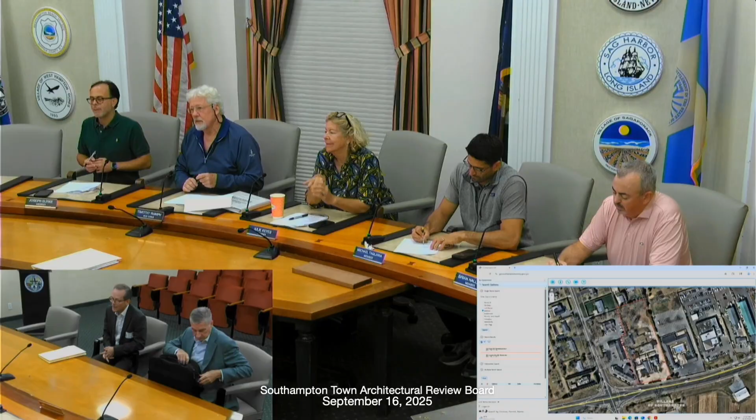We're in front of you with the property located at 257 County Road 39A, just outside the village. Some of you will remember it as Beacock's Gardens, others as Frankenbach's, if you've been here a while and you're old like me. So we made an application to convert part of the structure to a non-medical marijuana dispensary.

Got a copy of the site plan here, and I can show you what we're doing. There's a front set of buildings; this is where the dispensary itself will be located, and then there's storage. It's the storage building that we're replacing that's before you today. There's also a separate retail space that we're a subtenant for—the tenant has retained that, and it's part of the Merit Furniture store. So we have these two spaces, and that's the building we're looking at.

I did print out just some photographs that we had submitted to the planning board, and I can pass them down if you like.

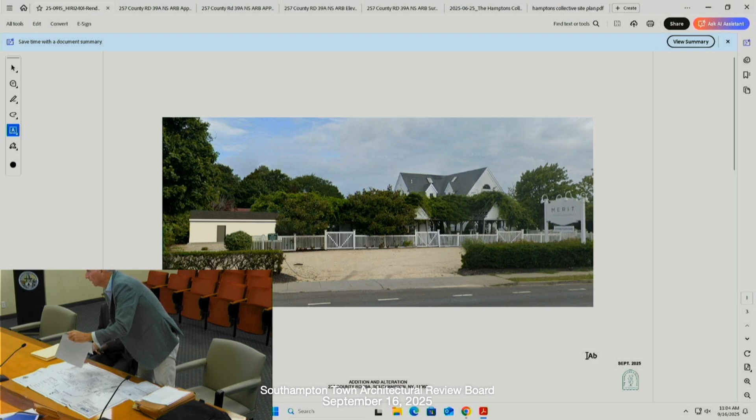The first photograph I took from the sidewalk, and you can see the building is set back behind some landscaping there. The second shot, I'm standing here looking at the building in a, I guess, south direction—it shows the building. The next two shots are up close, and they'll show you what poor condition the buildings are in now. There's an access way, and you'll see it's almost like a tarp is over the right-hand side in that picture of the roof. And then this is me standing where there's that indent, taking a shot of the roof.

So the structure's in really poor condition. Do you have a picture of this that we have, Kelly? I don't have those, no. This is the approved site plan. You may have it—there was also one with the highlight, the storage one highlighted. Yeah, there it is.

Thank you. So we went through the site plan process, we had site plan approval. Actually, prior to that, the planning board gave us a resolution of no objection to the issuance of a building permit, and I think that occurred somewhere in May, June.

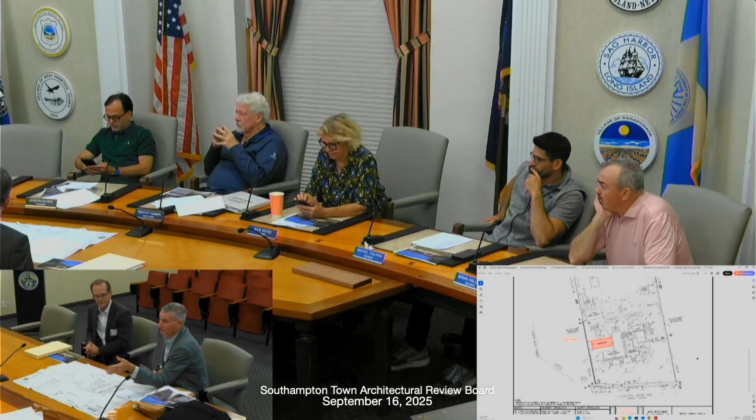Made an application for a building permit. It went back and forth with the building department about whether we needed to come here or not. I think Art Gerhauser said we probably do, and other people in the building department said we didn't have to come. So we're here, happy to discuss it. But in between the time we got the no objection to a building permit, we were able to get the actual site plan approval. So the site is approved, we're ready to go, and it's just a replacement of this building, which is in poor shape.

Can I ask, then, why are you here? Because Art Gerhauser concluded that we needed, or it would be a good idea, to get your approval. Well, it's really not—correct me if I'm wrong—what I understand is we're a referral to the planning board. They approve the architecture, not us; we send a recommendation to it. So how can we help Rooney and Paul on this application? What do we do?

So you could just issue a recommendation letter if you support it. Just want to have it in the file, so there's no issue after the fact. If I'm not mistaken, the original site plan didn't show the storage building.

It did, yeah. We've always had the storage building. It's an existing building that we were always using. I don't know why it wasn't referred. I just want to make sure we do it correctly.

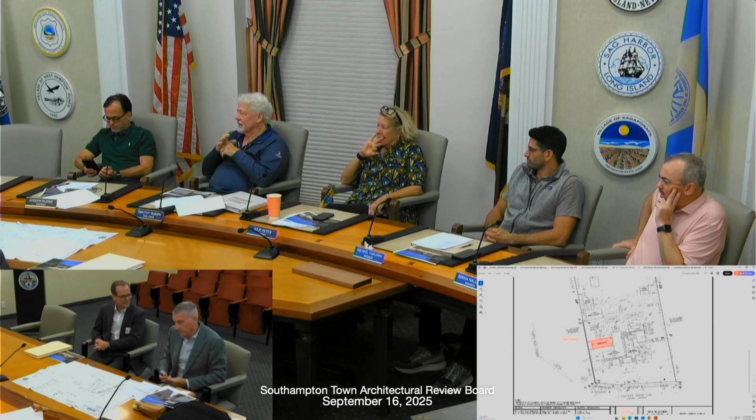I'm sitting here, and you said you already have site plan approval. I'm going, oh, what are you here for? Because usually we're in that process. I think planning probably thought we didn't need it, and then Art flagged it. So Kevin Pohl is here, and he will go through exactly what the change to the building is, although it's in place and in kind.

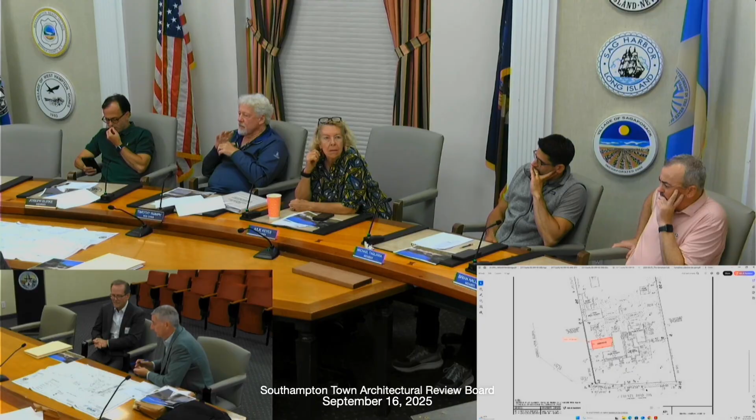So we are replacing the existing building in the existing footprint and existing size. The height and materials we're bringing up to speed a little bit. Right now it's a metal frame structure with fiberglass cladding on the outside and a fiberglass roof. We're making it conform to the current building code relative to storage use, and how it applies to zoning.

What materials are you going to use on the roof and siding? The roof will match the existing roof on the main retail building, which is a 30-year gray asphalt shingle. Is that the main retail, the house-like structure? The house-like structure is actually behind the main retail. The main retail is mainly covered with growth.

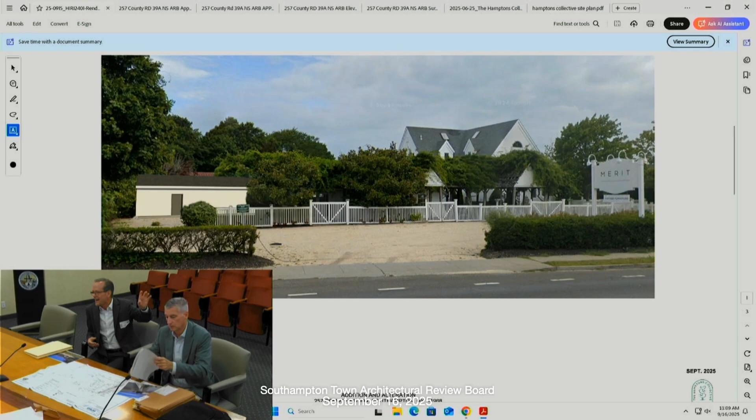Oh okay, I see, good, got lines on it. Here's a copy of that. And the retail that we're talking about is here - that's part of the merit space, and then it's completely covered with that landscape.

What about the siding? You won't really see the building, Kevin. Basically you'll see it'll be brighter white, but that's about it. It's in the same location, same plantings in front of it. If you've got the vegetation there, you're really not going to see much of it.

That's the building that exists, and it's being replaced in kind. So you'll see some of it, but not a lot. The height remains the same because we're tying into the eaves of the existing building, which has that same kind of corrugated fiberglass siding. We're looking at either that corrugated siding, which we're not in favor of, or a vertical HardiePlank board and batten - nice and clean, easy to maintain.

What is the height of the building? The overall eave height right now is 8 feet off the top of the foundation, which is about 8 inches off the grade, so about 9 feet. The main ridge is maybe 12 to 13 feet in height, pretty much the same as what's there. I just wanted to get an idea of the pitch and scale. It's a low pretty-pitched roof. Basically it'll just look like a more substantial structure.

In terms of massing, it doesn't get any larger or bigger. Is this going to be retail in here, or is it storage only? This is a secure storage facility. There's one entrance on the south side, on the street side, and then it effectively attaches to the retail building.

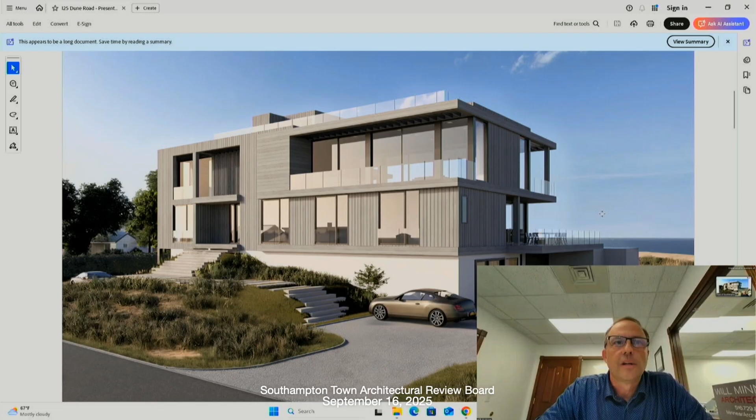Sorry I wasn't able to join the first time this was presented, and the renderings didn't make the submission. So I think I have all the answers to your questions and some more visuals that will help you understand the project. I can share my screen of the same stuff we submitted, or it might be easier for me to walk you through. That's okay? Yep, yeah, that would be great. Yeah, that's fine.

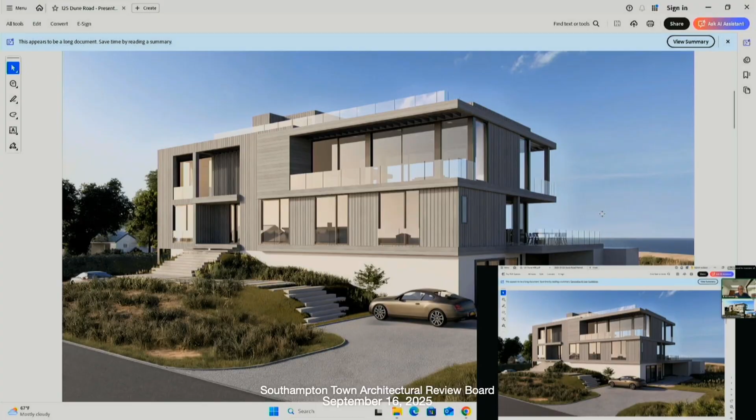So I read through the minutes of the last meeting. Let me bring you to the renderings, which I don't think you had. The house is mahogany siding. There are two applications: an open joint vertical application of the mahogany, and some bandings and details of horizontal tongue and groove with a nickel gap horizontal siding. It's all mahogany, so maybe there was some confusion or misunderstanding. The house is all mahogany. There's no real metal trim, if you will.

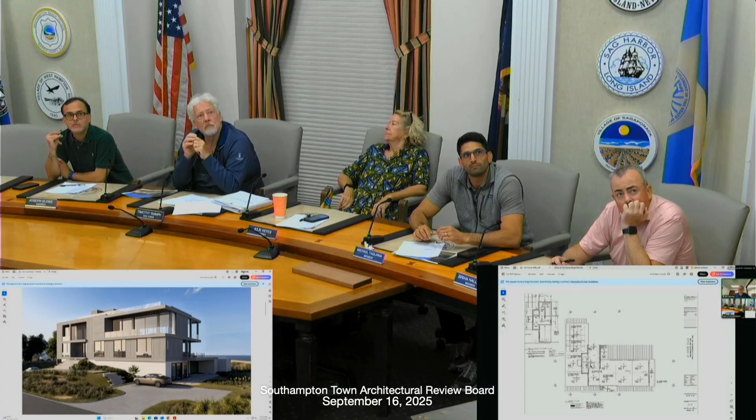The railings are all glass, and you'll see, I think on one of the elevations you looked at last week, was the east elevation, which is the left side of the house. So if I bring you to the roof plan, there is no roof deck on that side of the house, so you wouldn't see a railing necessarily from that elevation. That's where our mechanical spaces are for solar panels and whatnot.

Railings are all glass, structural glass, 100% glass railings. There are some second floor balconies and a roof deck.

The window color, I believe, was dropped off to you. The only metal on the house is the extruded aluminum frames, which are tannish in color. I think it was dropped off, if I'm not mistaken. If not, I could pull it up. This was the color, if you can see it, it's probably really muted coming through on a zoom. But it's a color to complement the mahogany as the mahogany ages and weathers over time.

So we don't have that, but I'm glad you shared that with us. Yeah, there's a RAL color associated, and we can get you the color chip. That's the color, it's sort of a warmish tan, brownish color, if you will.

In the renderings, let me show you what happened. So there are some columns in between the windows, which we're going to have brake metal to kind of join the windows. That's really the only trim, if you will, and that would be all in that sort of tan color.

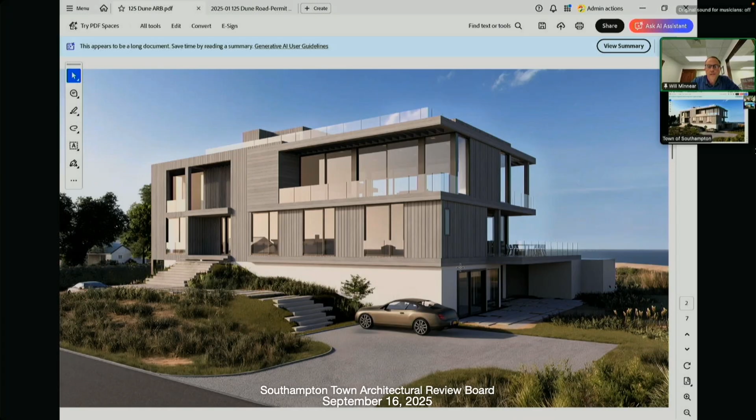As I flip around the house, this is the back of the house. There's a stair tower to the roof, and some balconies. As far as lighting goes, there's no sconces on the house.

I do have a night rendering we submitted just to show you. There are very small, low lumen downlights in some of the trellis and overhang areas, but there are no sconces visible on the house.

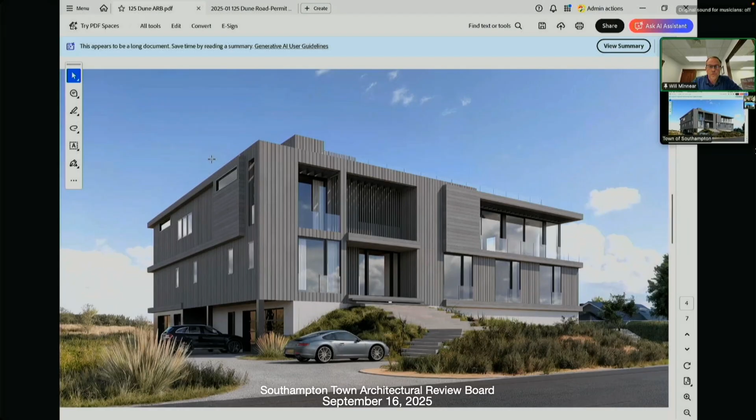Another perspective, and you'll see there's no railing on this side of the house. There's no roof deck there.

This is sort of at dusk, again our night shot to give you reference to where the lights go. So there is some lighting at the front entry canopy, some small downlights in the trellis work around the second floor of the house, and then just safety and path lights in the landscaping to bring you up to the front door.

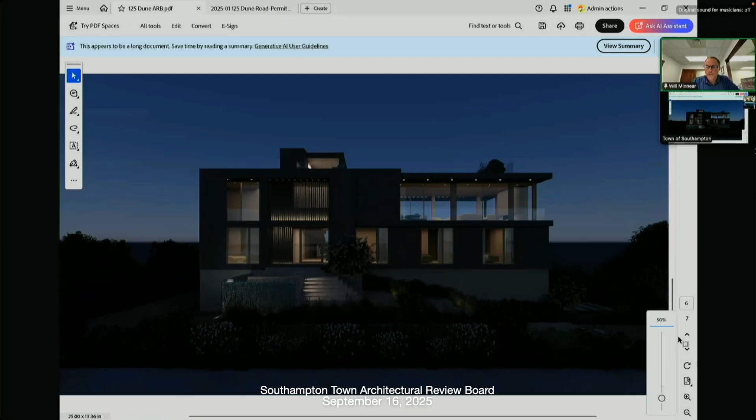So if I didn't answer any questions, if you have any other questions, I'd be happy to try to answer them for you today. Michael, you're the lead, do you have any issues? I think you've satisfied all of the requests from last submission. I don't see any issue. Okay.